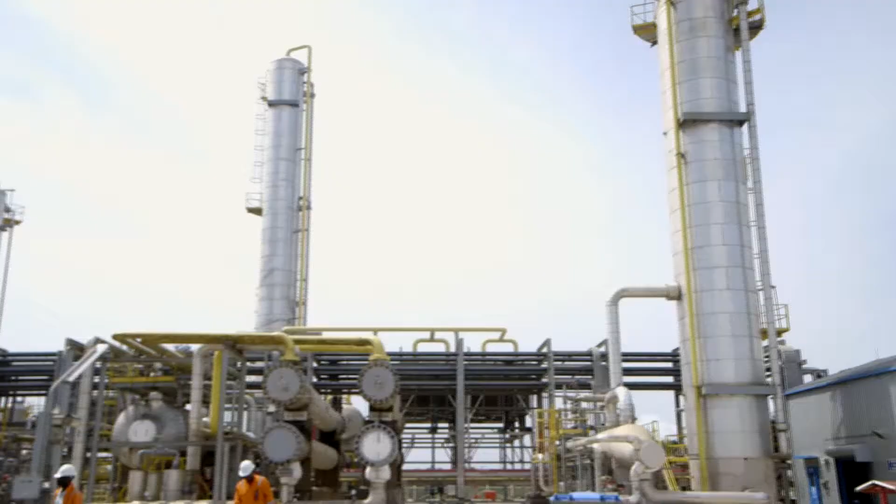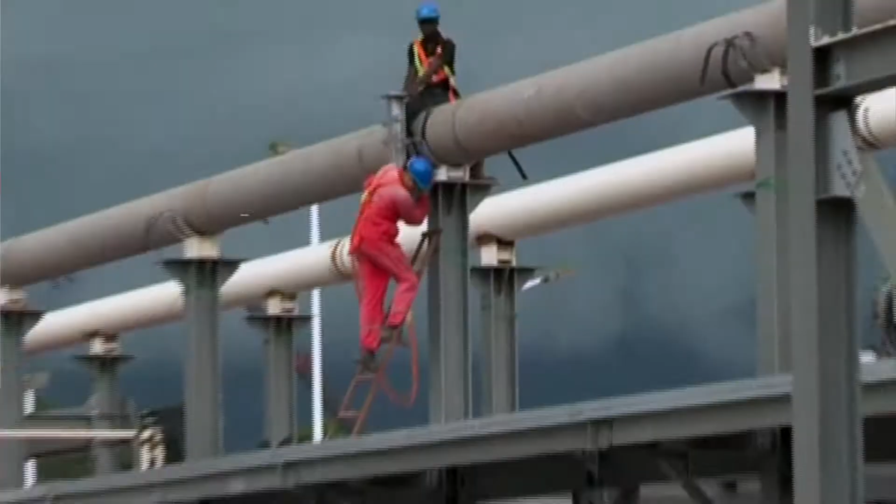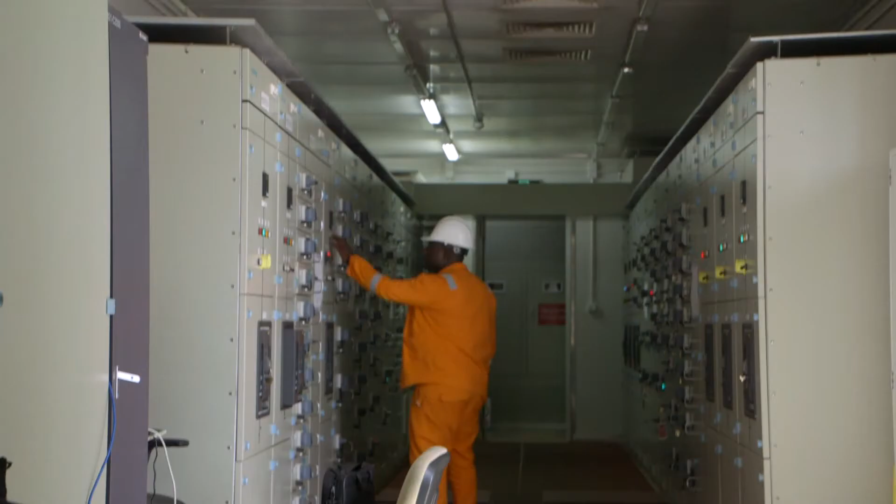We had initially employed the services of what you call an operations and maintenance consultant. These were the Chinese, and they have been actually operating the pipeline and the processing plant on our behalf, and we are grateful for that. But I believe it had come to a time where our men and women should actually take control of the consoles, take control of the processing apparatus, take control of our process areas, and actually run the plant themselves, also run the pipelines. So we have totally indigenized our operation.

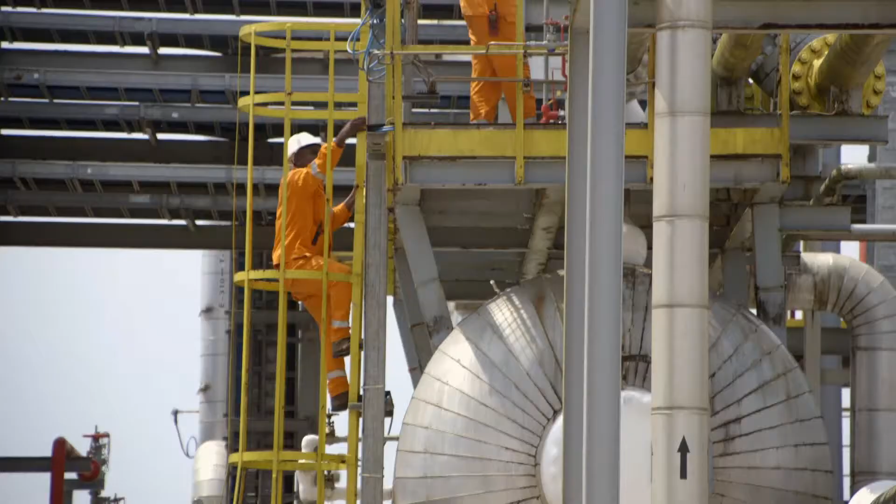So if you go there, as you did, you saw that almost everyone there on the process floor, in the control room, at our utilities area, they're all Ghanaians. You're saying that now the entire facility is being run by Ghanaians? Absolutely, and we're very proud of that. In 3 years we have totally indigenized. So we are very proud of that. That's a good story. That's a really good story.

It also has got some financial implications for us. We were spending close to about 10 million cedis a month just to employ the services of our friends, the Chinese.

The current components of the Ghana Early Phase Gas Infrastructure Project include the offshore export pipeline that is from the FPSO, located some 60 kilometers away from here, to the GPP, a 12-inch pipeline, high-pressure line.

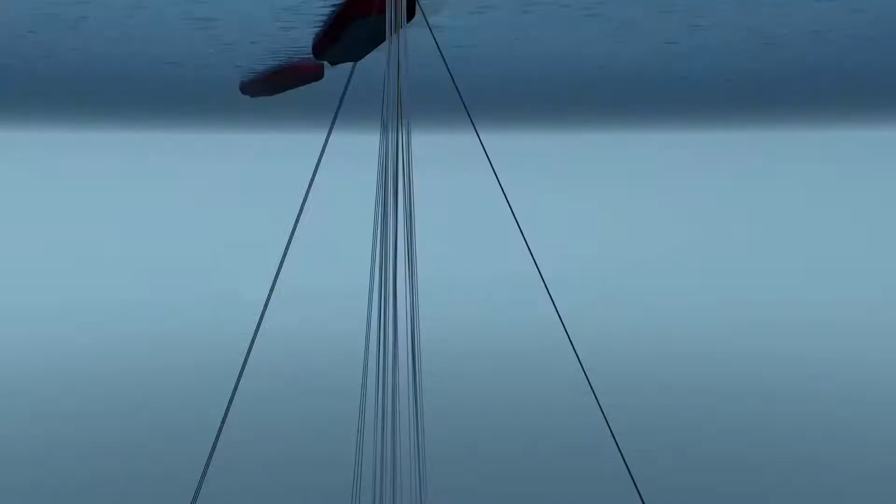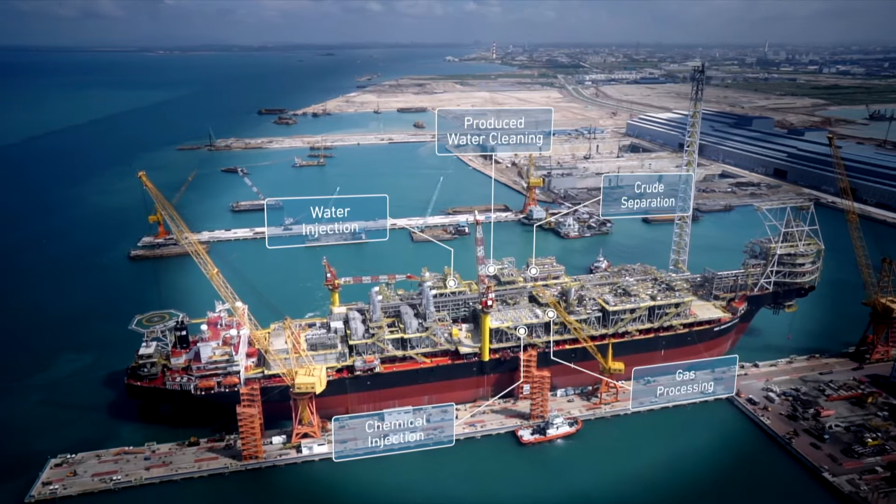From the indications of the flurry of activities on the sea by Tullow and ENI, it seems as if we are going to have many more sources of gas in the country in the future. Ghana Gas Company may well be what the doctor ordered to aid our ailing economy. Surely, it may just be what we need to establish our industrial base as a country. It is estimated that with the current gas discoveries, Ghana National Gas Company is going to be around for at least 25 years.

Ghana Gas's mandate is fourfold: we do gathering, we do transportation, we do processing, and we do marketing of the natural gas resources. The gathering typically is what you will notice—the offshore pipeline that takes the raw gas from the Jubilee field is a straight bullet pipeline, and it has a capacity to take as high as 240 million standard cubic feet per day under packing conditions.

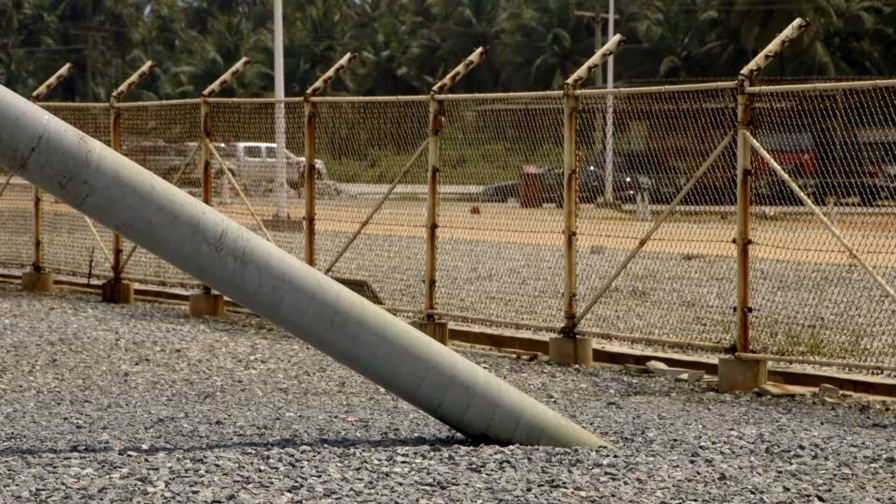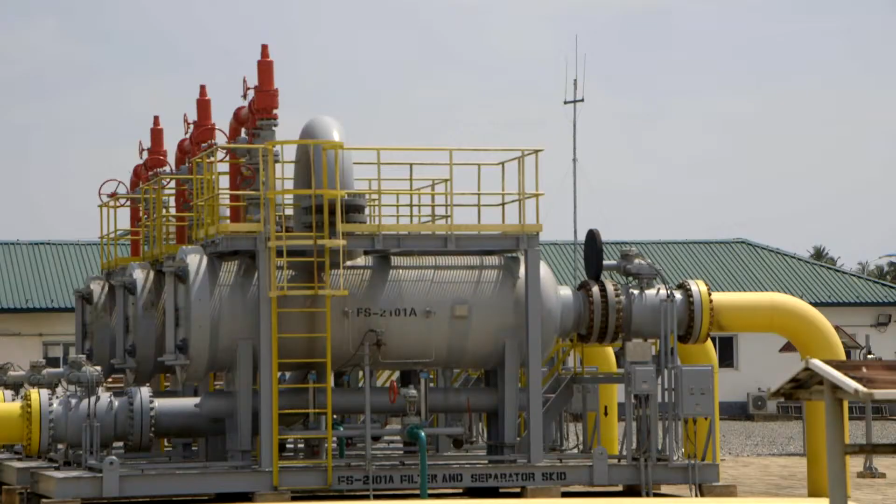So that line can allow other producers to tie in such a way that it serves as a gathering pipeline. After 58 kilometers at sea, the wet gas comes in and it is metered to ascertain how much of it is being taken into the processing plant. The first process is to remove all the impurities in the wet gas, after which, under very intense pressure and temperature ranges, the gas is processed to attain the dry gas referred to as the sales gas, ready for use by power plants and big industrial concerns.

Every hour we move into the plant, we check the parameters, and we also take data, readings of all the essential parameters in the plant. What we do with this data is that it helps us to be able to know the efficiency of our plant. These units are capable of cleaning the gas that is going out.

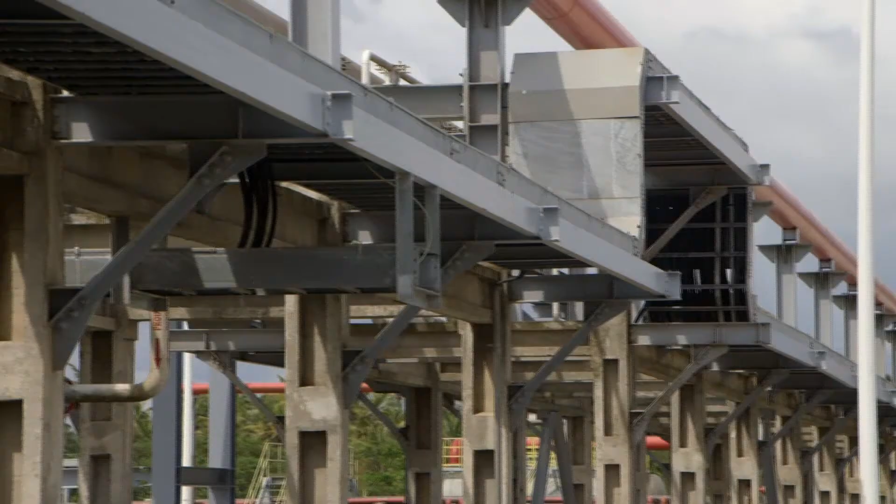And this is a measure to prevent smoky flare. You know, smoky flare, when it's smoke, it's pollution. And then again, when you flare, for safety reasons, it's good. Because if we don't flare and release hydrocarbon to the environment, there is that tendency that if somebody is smoking around their flare stack, or if a farmer is farming or a tapper is carrying fire, and there's a vapor cloud in the atmosphere, there can be a serious tendency of fire and explosion.

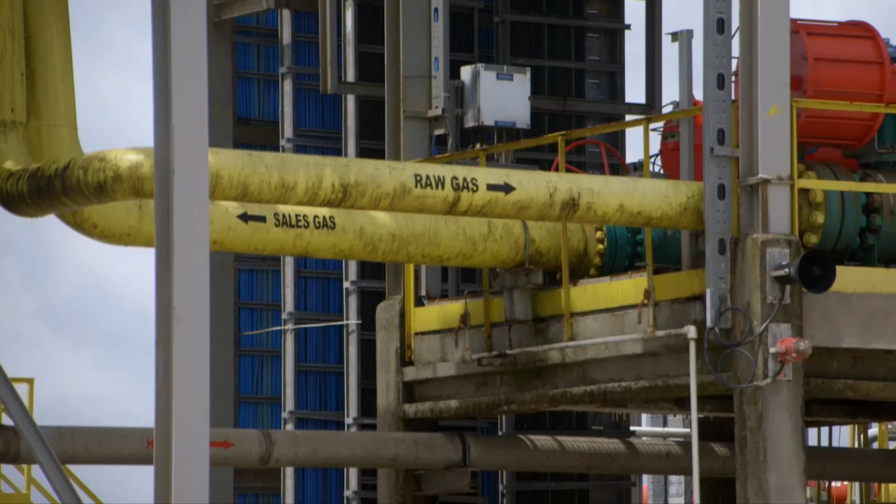At this point, Ghana Gas would have attained the kind of gas that can be sold to end users such as power plants and industries. And the metered processed gas exits from the plant at the same place as it entered, but through a different pipeline.

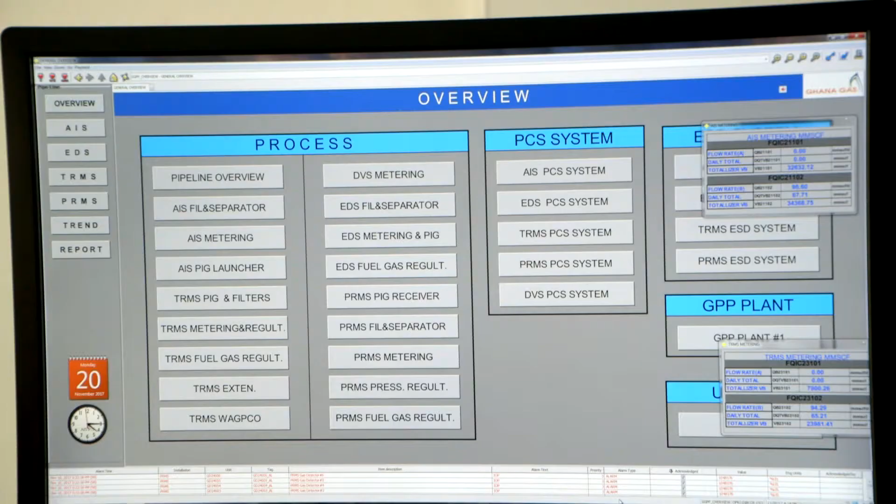At the inlet of the station, we have a gas chromatograph. What it does is take a sample of the gas online and give us the gas composition so we can know the quality of gas being produced.

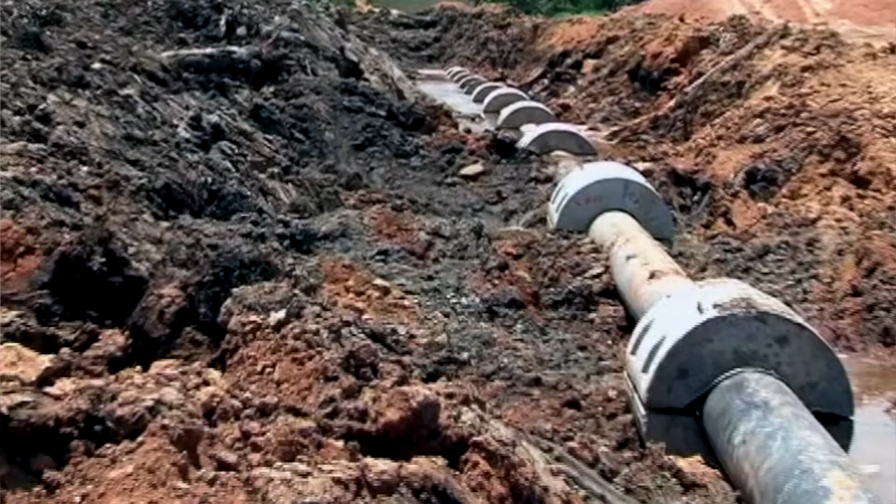From there, it comes through the filter separators, where the gas is further sieved to ensure it doesn't carry any particles. The dry component is taken out and sent through a pipeline from Atuabo, 111 kilometers, 20 inch, straight to Aboadze, where it is sent to VRA for power generation.

Ghana Gas is dealing with over 100 communities as far as our pipeline and related activities are concerned.

Before the project commenced, an environmental impact and social assessment was carried out on the ground before the facility was put up. During that process, mitigation measures were proposed so the project's impact doesn't negatively affect the environment. Because of that, we carry out analysis using the equipment in this lab.

The analysis is basically carried out for air quality, water, effluents, and noise.

Sometimes we organize sensitization exercises to educate the community on our activities, and we invite regulators to come in - that's EPA, the district assembly, and any stakeholder needed. They come in, assist, and we educate the community so we have a cordial relationship with them.

On a day-to-day basis, I'm in charge of cathodic protection and corrosion control, to ensure there is no corrosion on our pipelines.

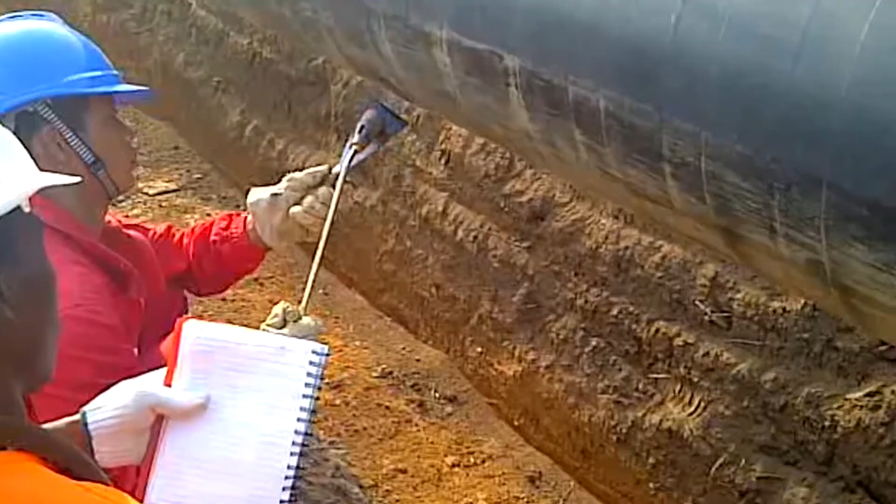We normally visit the right-of-way where the pipeline has been installed and carry out our tests. We're also in charge of inline inspection to check for leakages, cracks, anomalies, and other defects on our pipeline. When it comes to designing, we ensure whatever we do is in accordance with our standards. Basically, that's pipeline integrity.

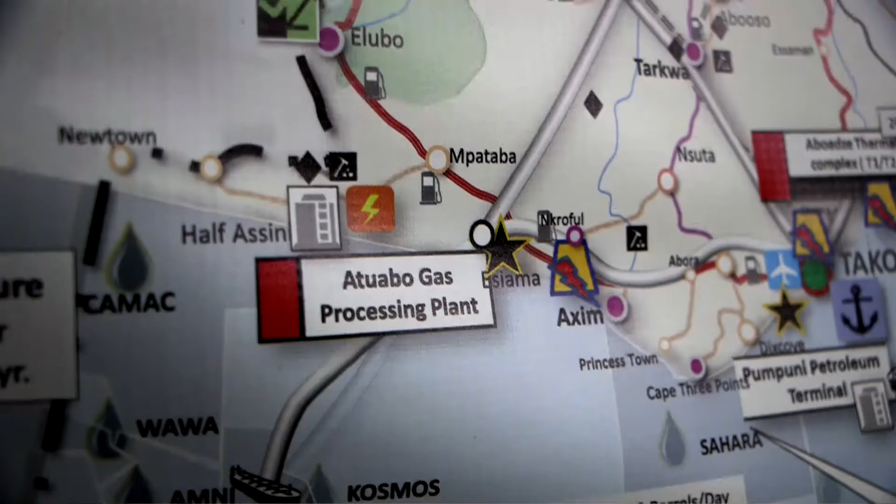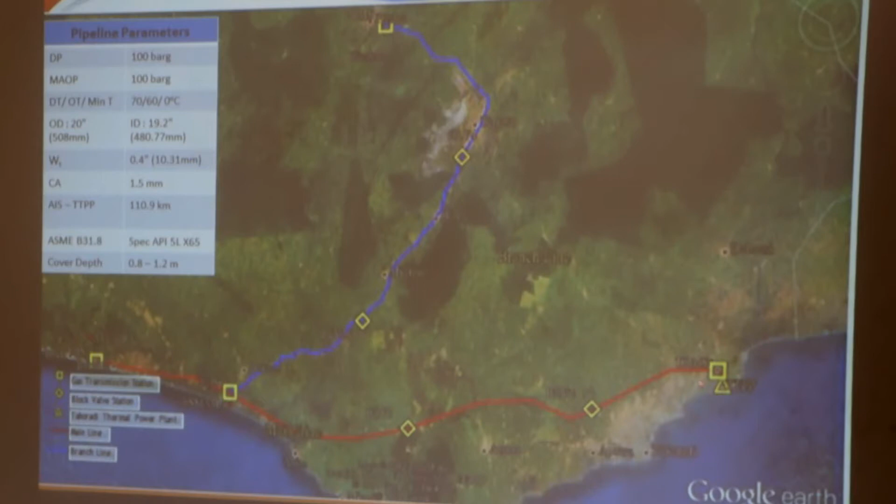If you look at the Ghana map, this is how our onshore pipeline looks like. This is Atuabo, this is Esiama. The main pipeline is the red line you see here, going through various districts and communities, all the way to the Aboadze Thermal Plant, VRA.

This is the TRMS, the Takoradi Regulating and Metering Station. VRA is just close by, which takes the gas and produces power for us.

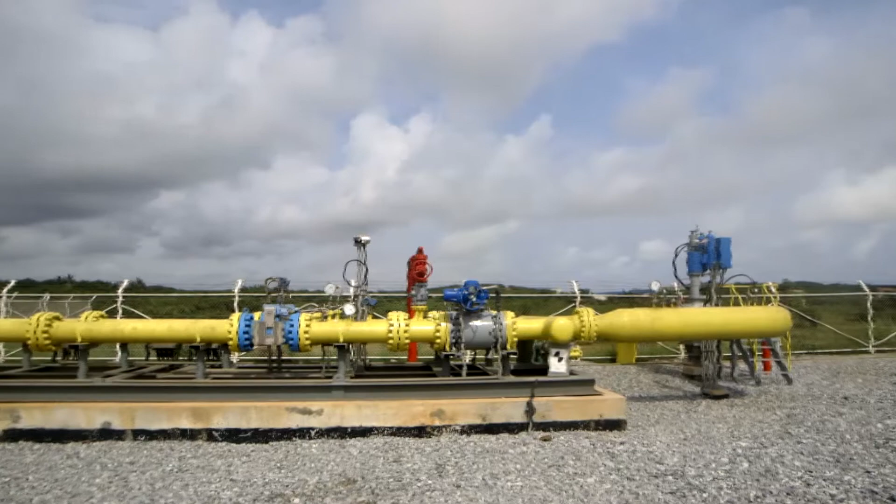At the Takoradi Regulating and Metering Station, TRMS, Ghana Gas Company supplies various facilities that need dry gas for production, such as the Twyford Company in Shama.

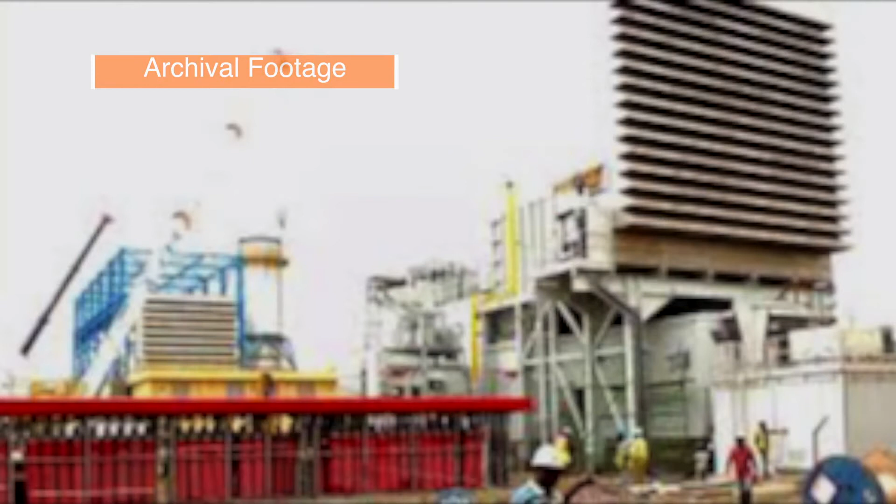Today, a number of power plants are using gas as a source of producing our national energy needs. It seems our future will rely more on gas as a source of energy than other available sources. Therefore, Ghana Gas is going to be a very important player in the production of energy in the country.

When it comes to industry, there are many industries stuck, not just for power production but needing gas as an input, because hitherto we did not have sufficient quantities of gas to inject into their production processes - steel manufacturers, for example. As we get more gas, our economies become more efficient, we come to depend on it more, and we improve in terms of our daily outlooks in life.

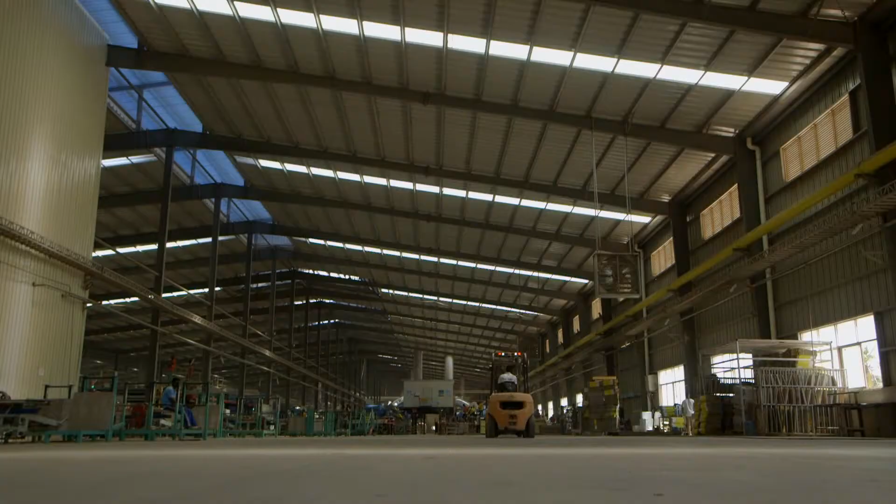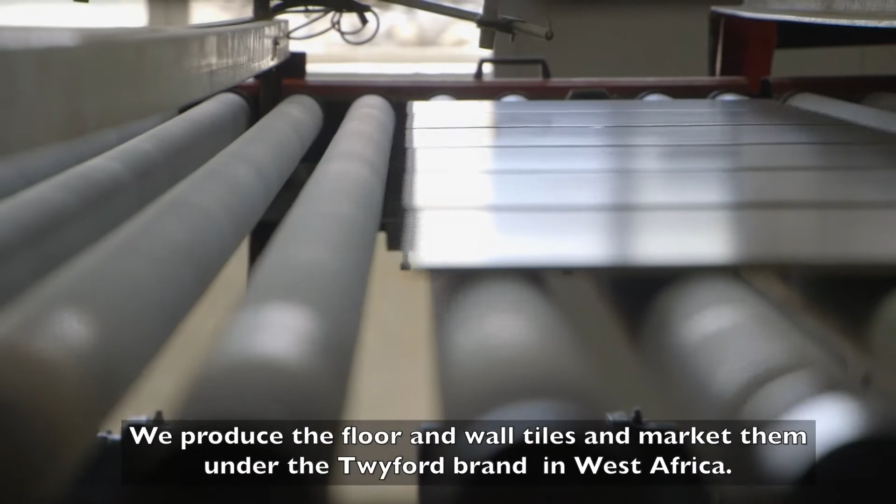We're doing floor tiles and wall tiles, using the Twyford brand to market in West Africa. Currently we have employed around 800 staff, and I think we are going to hire more.

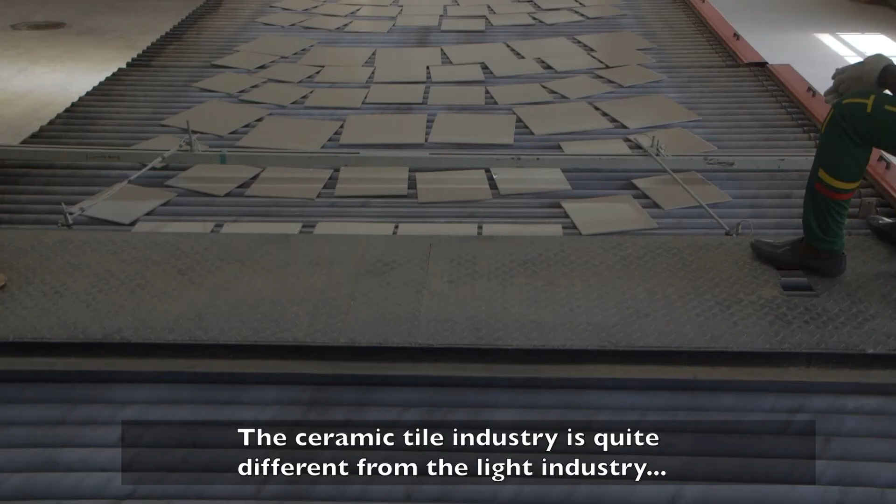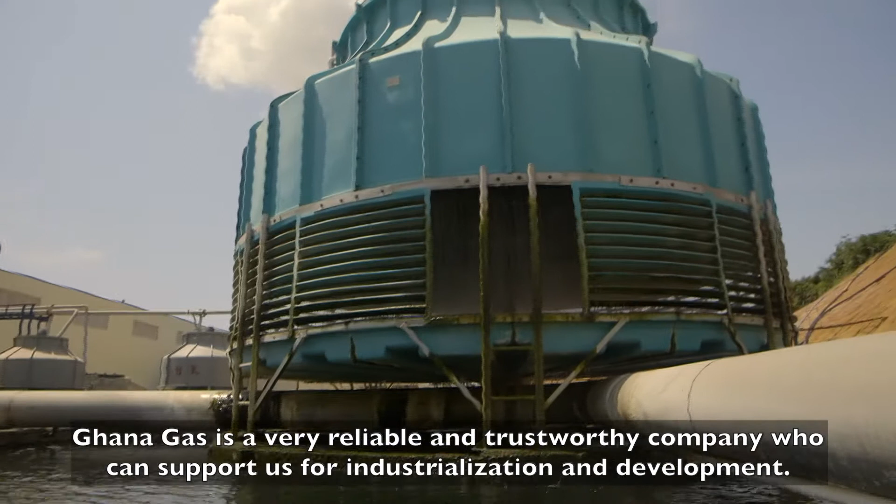Doing the ceramic tile industry is different from other light industries - you need energy for power and energy for heating. It's very important. Ghana Gas is a very reliable and trusted company that can support us for industrialization and development, not only for Twyford.

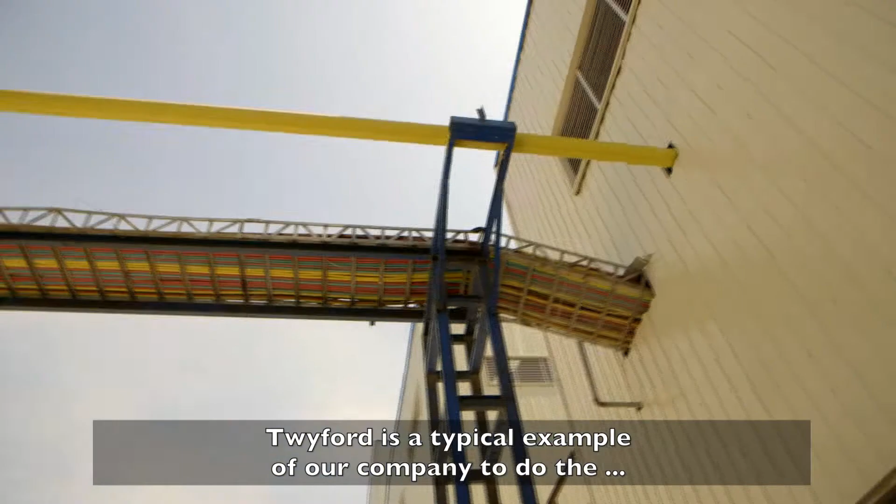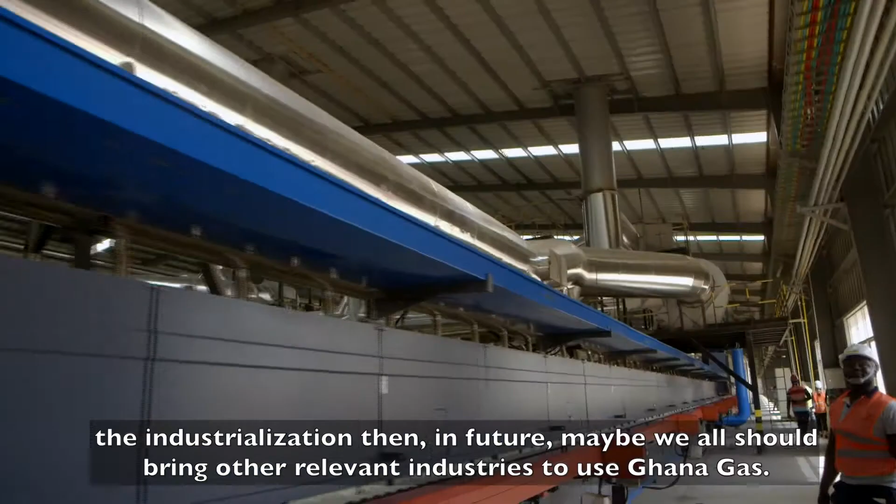Twyford is one of the successful examples of our company's industrialization. In future, we may also bring other relevant industries to use Ghana Gas.

While Ghana Gas produces dry gas for various power generating plants to use, the plant itself also uses its own produce to generate the energy required for all its operations. After all, why sell a produce that you cannot trust to use?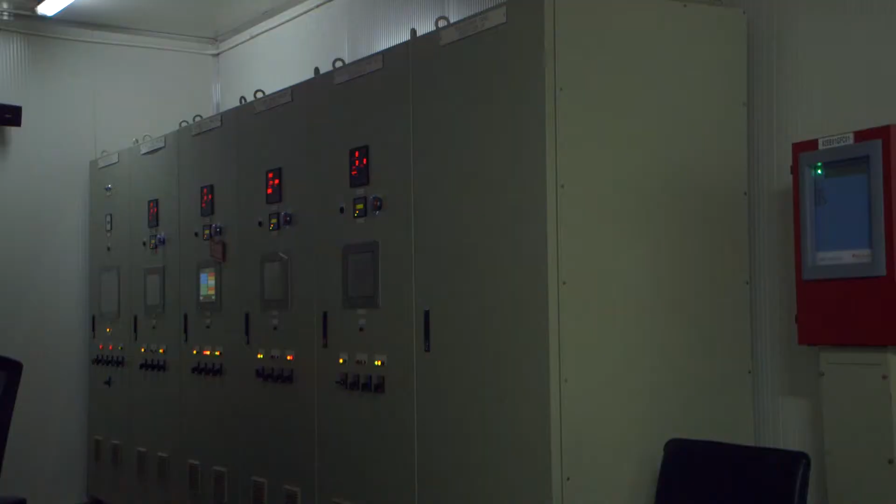The Ghana Gas power plants are able to generate in excess of 2,700 kilowatts. My job basically is to ensure that there is constant power available to the plant, and that it is also of the right quality.

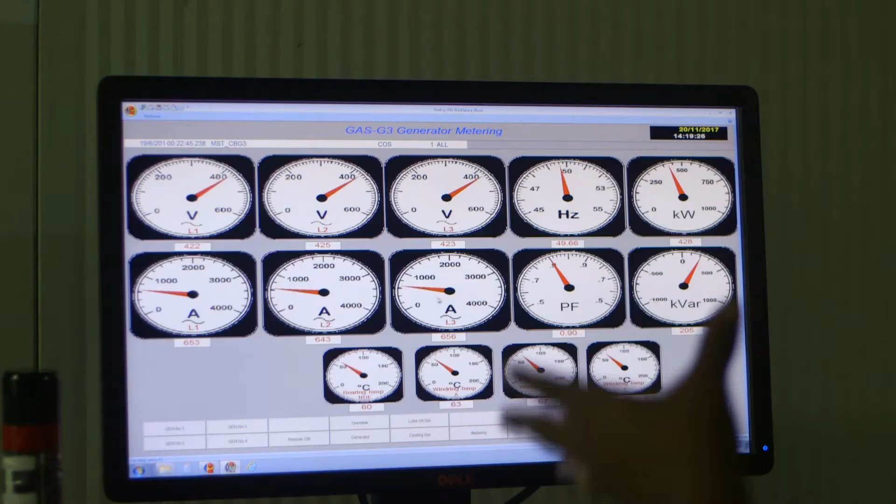I do an hourly routine inspection and monitoring. All the various parameters, I monitor them on my screen. So I make sure that the voltage, which is very important, the current, the frequency, and the temperatures are all within specified limits.

Once the dry sales gas has been extracted and sent to the various industries to be used, the remaining gas in the plant undergoes more processing, out of which a second produce, liquefied petroleum gas or LPG, is attained. Increasingly, this product is becoming most essential in the daily lives of Ghanaians.

Typically, we have 4 storage tanks, each of capacity 2,000 cubic meters, totaling 8,000 cubic meters. After storing this LPG, we also have a pipeline linking the storage tanks straight to a loading gantry.

Vehicles, that's the road transportation tankers, come there to offload the LPG to the local markets. We normally operate the pumps. For our area, most times we do manual operations - manually opening valves, isolating the lines, lining up valves, pump operation, and all these things are part of our day-to-day activities.

We have a company, Quantum Terminal, that we normally transfer the product to, and they also give it to off-takers.

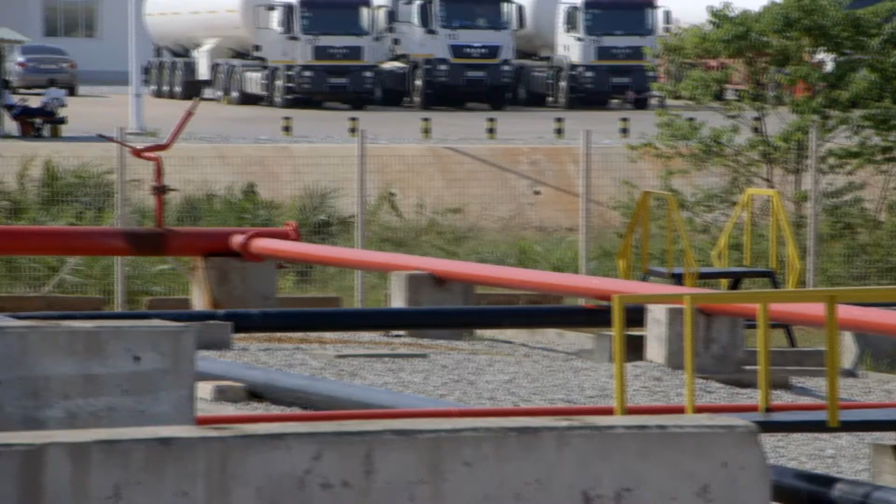From the meters, the product gets into our tanks. We call them bullets, each of 500 cubic meters capacity, so it can store about 250 metric tons. One of these bullets can load about 10 trucks. So for the 3, we are talking about 750 metric tons of storage.

Ghana Gas and us entered into this partnership some years back, and it's been very helpful to us because as an evacuation facility, we don't have business if Ghana Gas is not producing and sending the product to us. So since 2014, we have had to depend solely on the product coming from Ghana Gas, and that has sustained our business. It has given us the opportunity to employ people.

Of course, it's given us income, and on the national level, we can say that since Atuabo Gas started, since Ghana Gas started producing gas, it's helped stabilize availability of the product on the market. We currently contribute 50% to the current consumption of LPG in the country. Take that away, and we wouldn't have had 50% of LPG in the country, and I think we would have been talking about a shortage of LPG, or importing more expensive LPG.

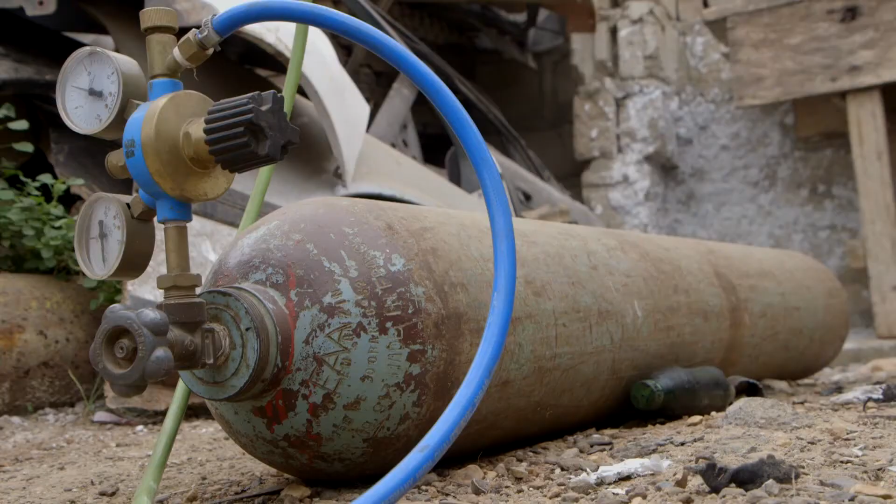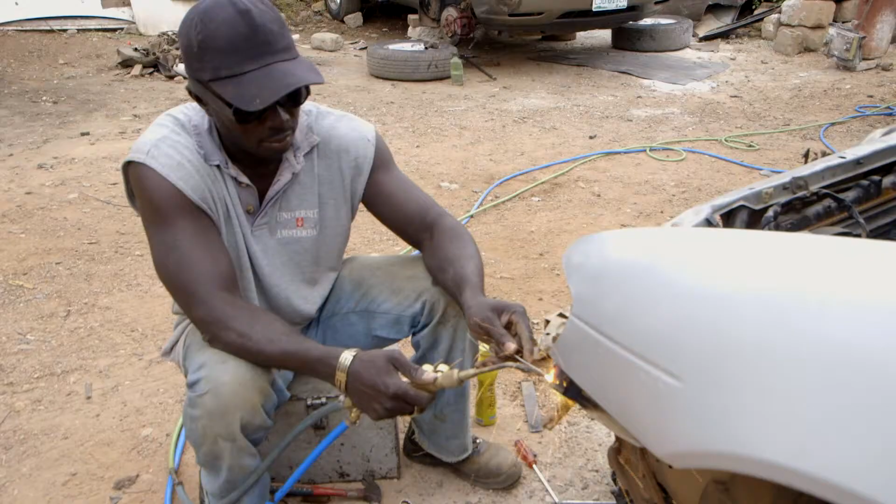In addition to this relief for those who cook, the LPG has become an essential power source in everyday transportation, just as this produce of Ghana Gas Company has become the main source of energy for the work of many artisans in the light industries, not to mention the electricity we see in our homes and offices.

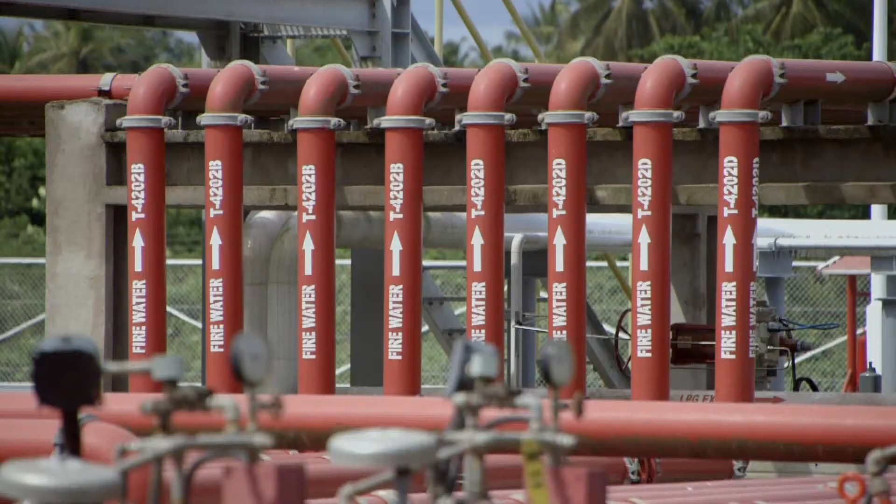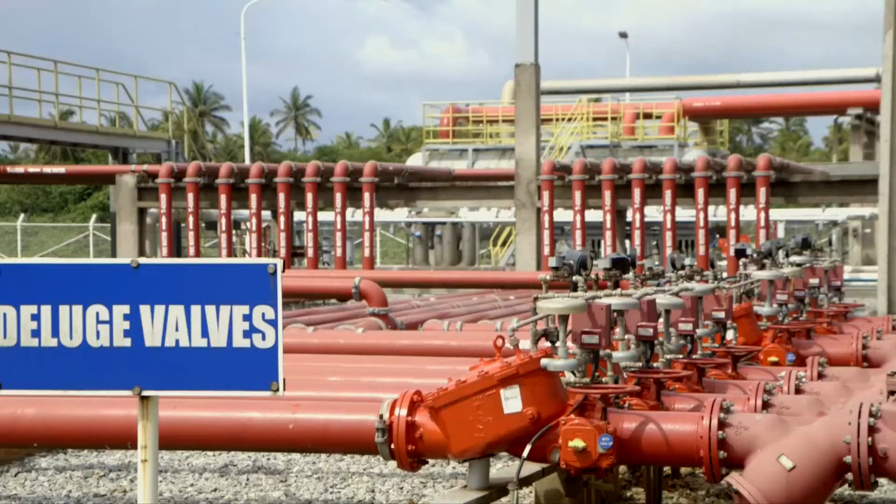It should be obvious now that at a volatile facility like this, safety must be a key component of their work. An elaborate network of red-colored water conveying pipes has been built into the whole processing plant to ensure that water is available wherever and whenever it is needed to cool various tanks and fight any fire.

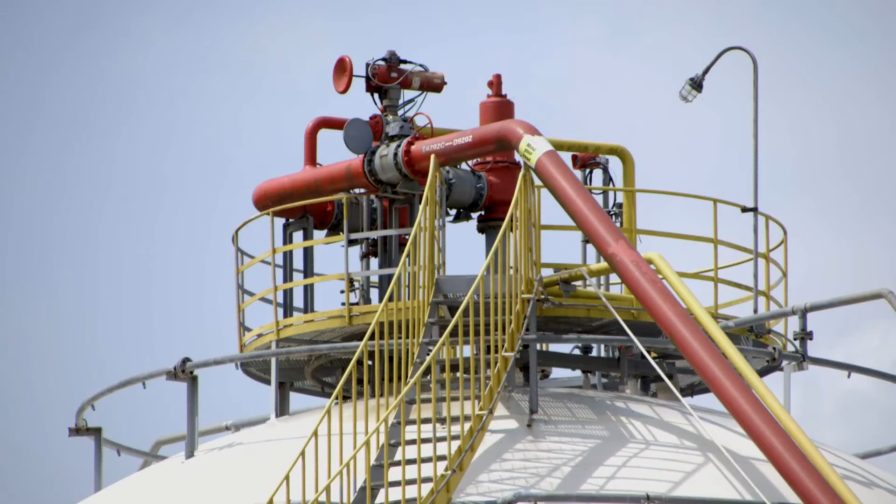Those two tanks you can see are the firefighting water tanks. Each one stores a capacity of 4,000 cubic meters of water, about 4 million liters per tank. Per the design philosophy, one tank can supply water to fight any kind of fire within the facility for an average of 6 hours.

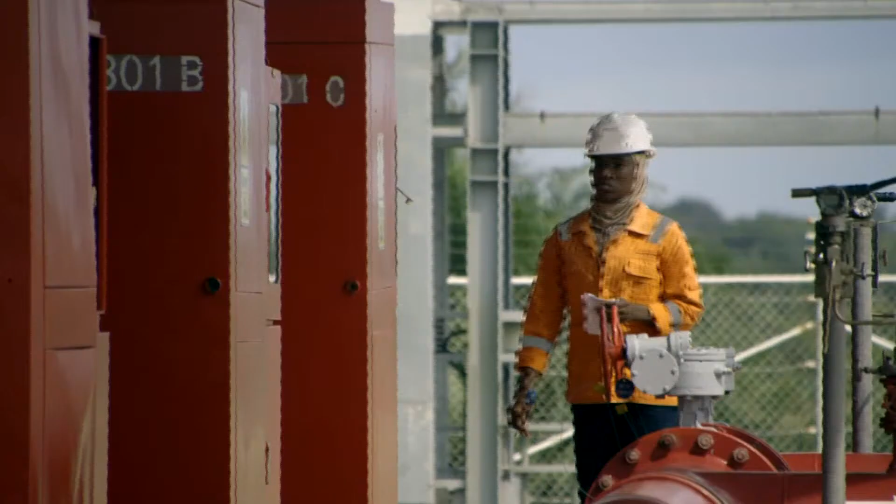That is how far. If we do have any fire in the facility, we anticipate that within that period of 6 hours we'll be able to mobilize external support to add to what we have within the system. Also scattered around the facility are a number of communication devices and public address systems that allow for easy information dissemination to everybody on the plant.

So that is the furnace for heating the hot oil. The hot oil then goes to heat up the towers. When it is cold, it comes back for reheating. So it's a cyclic process.

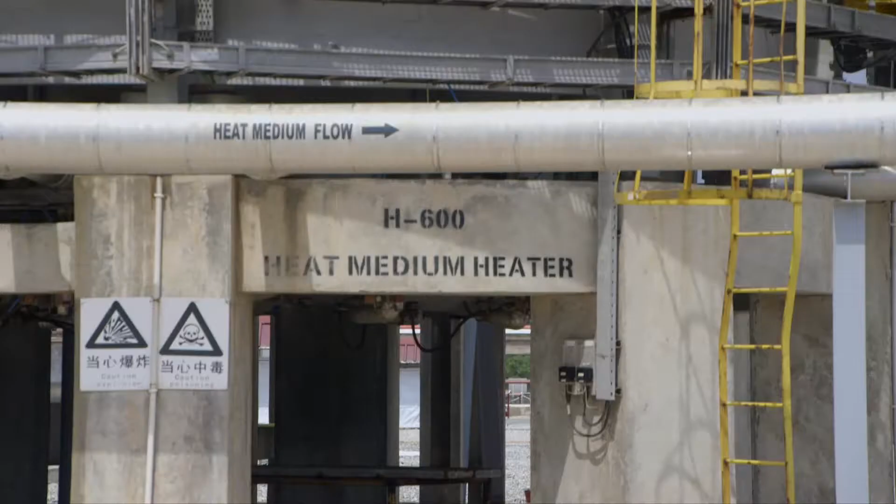After the LPG has been taken, there is yet another process. With expander compressors that allow for raising the pressure and cooling the temperatures, the pentanes and the condensates are also extracted. We have about 2 tanks for the condensate and 4 tanks for the LPG gas.

What we normally do during our day-to-day activity is to monitor the tanks and their process parameters, ensuring that the product coming in from the process area is in good shape. We also supervise the transfer of liquids from these 6 tanks, namely the condensate tanks and the LPG tanks.

For the condensate tanks, we have third-party off-takers that normally come to our condensate bay, and we are in charge of loading those trucks with condensate.

The volatility of the isopentanes and the condensates is such that its handling must be under very serious scrutiny. That is why Ghana Gas and the Government of Ghana are engaging General Electric and Mariners to build a plant that could use these products in places of close proximity to the gas plant.

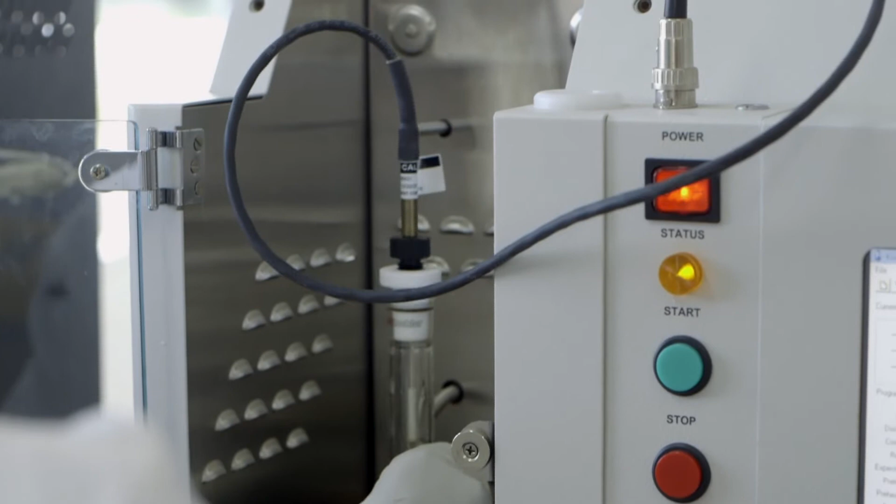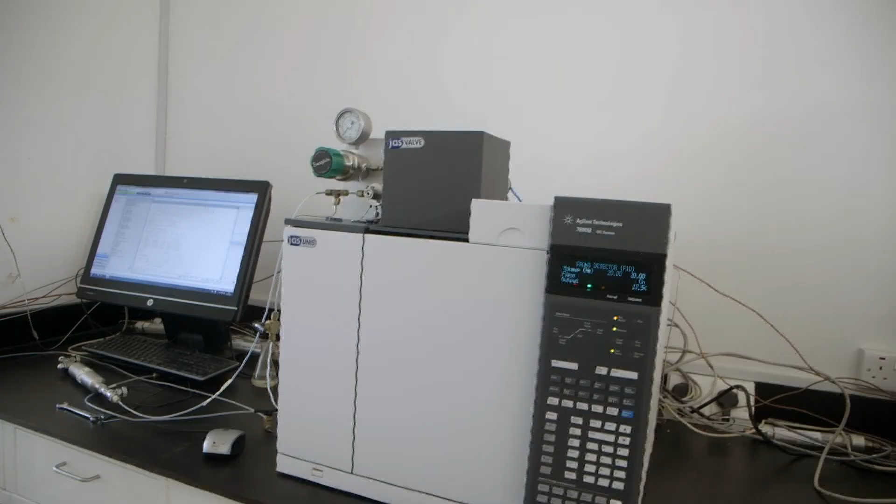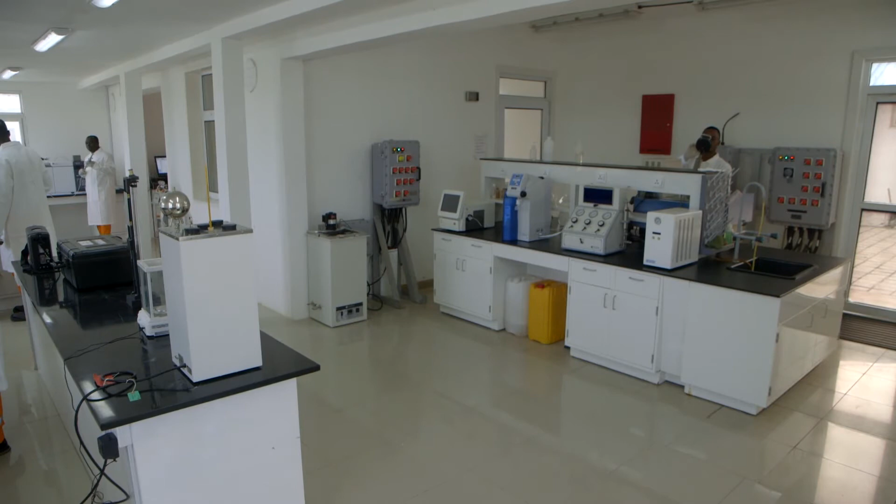We work with these two main instruments here. This is called the gas chromatograph, and its function helps us determine the compositional makeup of whatever is injected into the GC, whether it's raw gas, sales gas, or LPG. This equipment is able to determine the makeup of the gas.

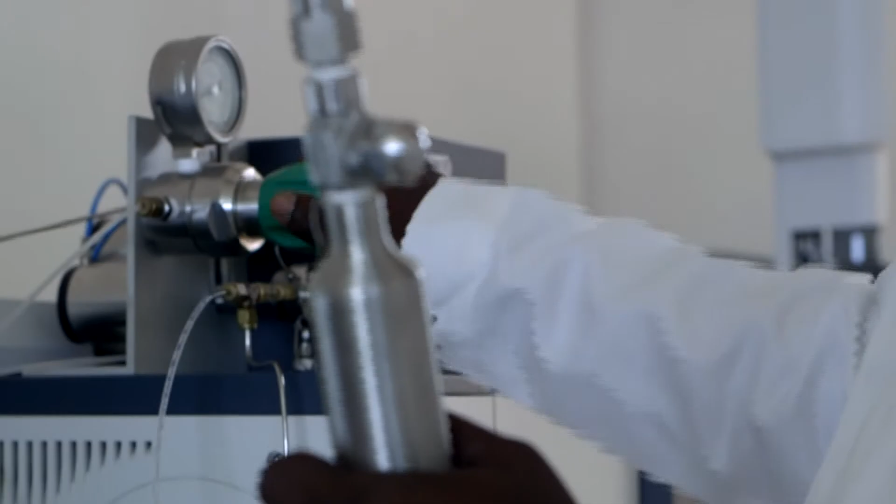Over here we have the automatic distillation analyzer. It's often used for analyzing the different boiling points present within a condensate or within a gasoline. This is the purpose of the automatic distillation analyzer.

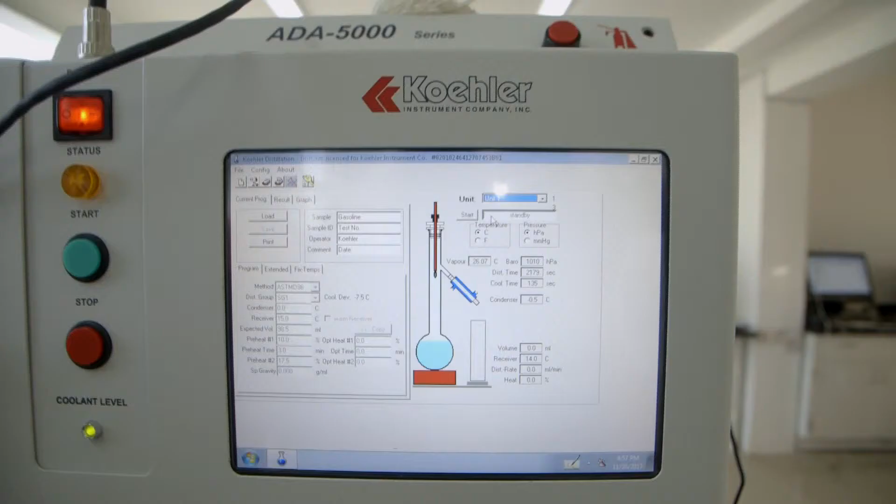What it does is apply heat to the sample within it. As the sample has different fractions and compositional makeup, as it boils out, the lighter ones often come first, until the whole quantity is boiled out, and we end up getting a profile of the condensate within it.

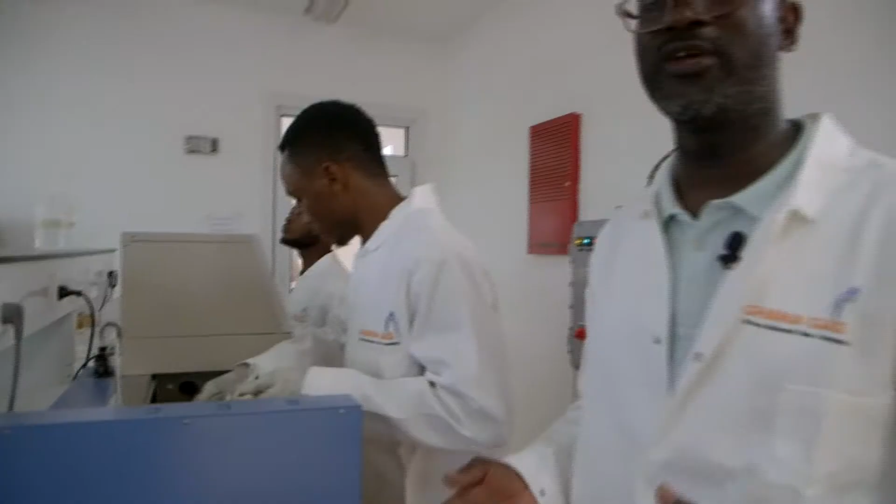We need to know the pressure that when petrol goes into a tank or a bulk vehicle, like the tankers we see on the road, what kind of pressure it can be subjected to before it is not safe. So every time we do any condensate analysis or LPG analysis, one of the key things we need to determine is the vapor pressure.

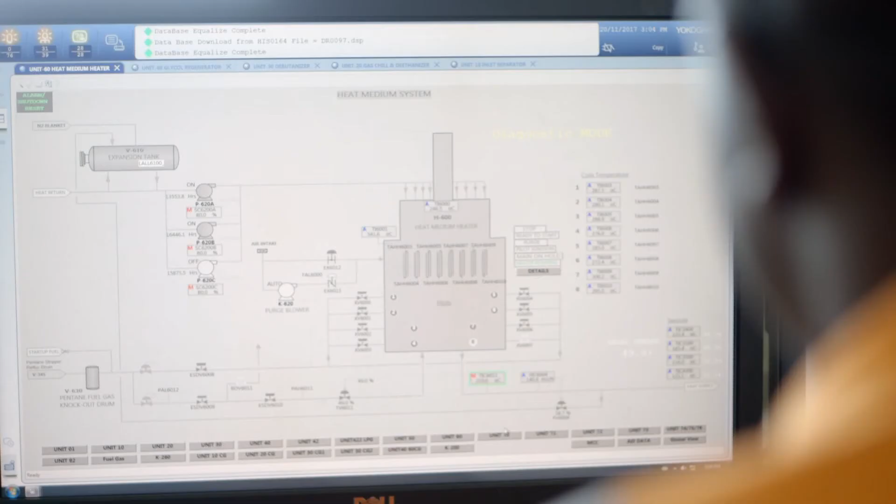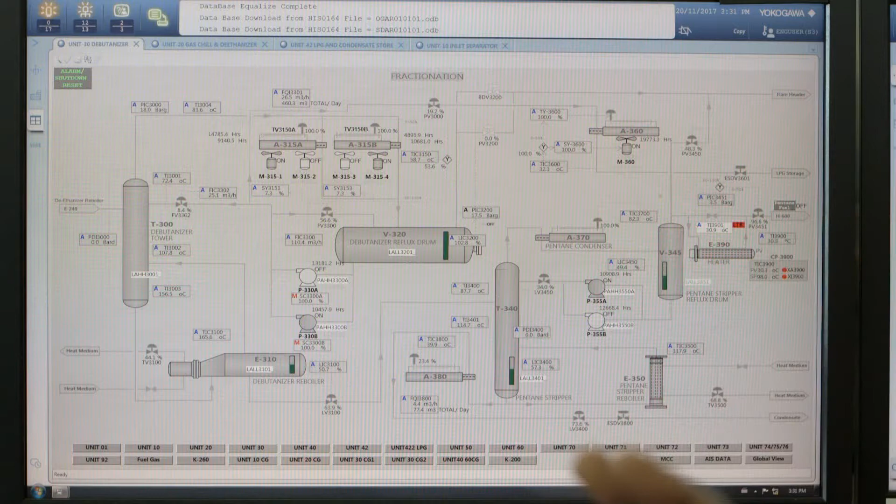All these activities across the plant are closely monitored by a group of young engineers at the control room, to ensure that every single activity goes on when it must and in the way it must, and to ensure that the automated machines are all working perfectly.

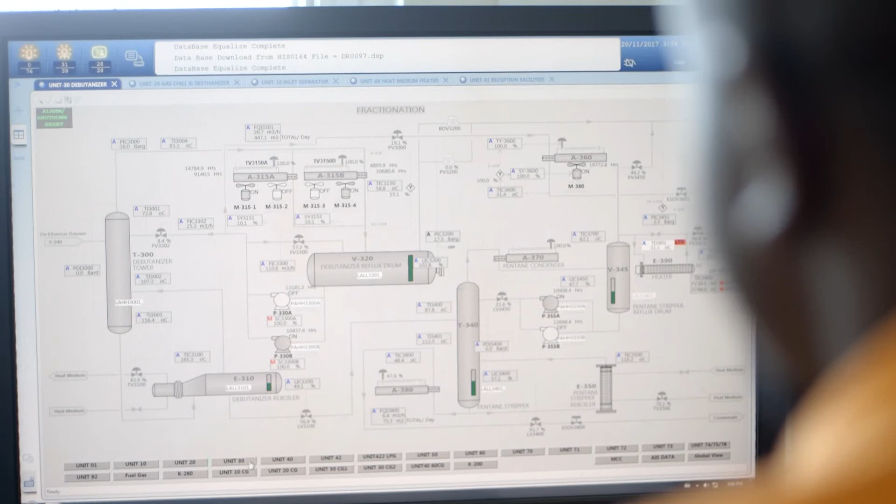We monitor and control the process parameters here, and we also receive gas into the facility. What we have here is your HMI. Everything that is on the field you can see here on the HMI. So what we do basically is monitor and control the process parameters to get the right gas specification so that we can send it to our downstream partners for consumption.

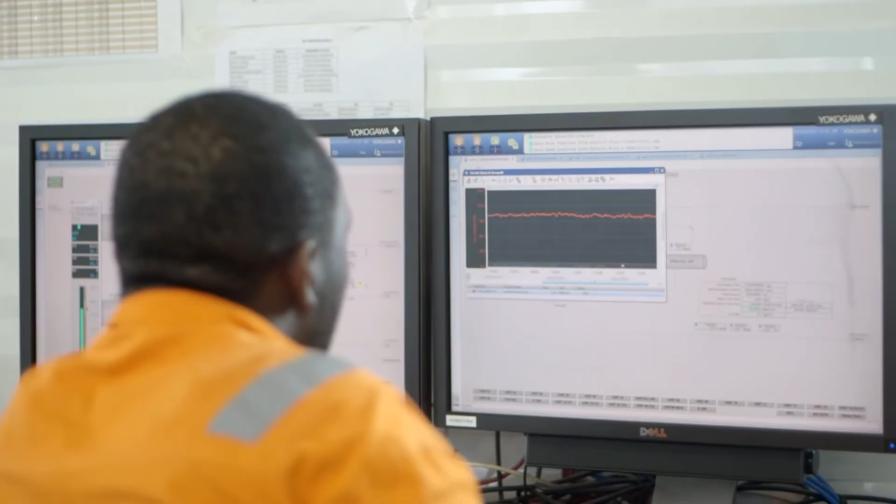From the inlet filter, you go to the de-ethanization unit. That place is called Unit 20, the gas chilling and de-ethanization unit. The gas comes from the filter and splits into two, going through the gas heat exchanger and the gas-liquid heat exchanger. At this unit is the first place you get our first product, which is the sales gas that goes to VRA or TRMS. So this is where we get our first product.

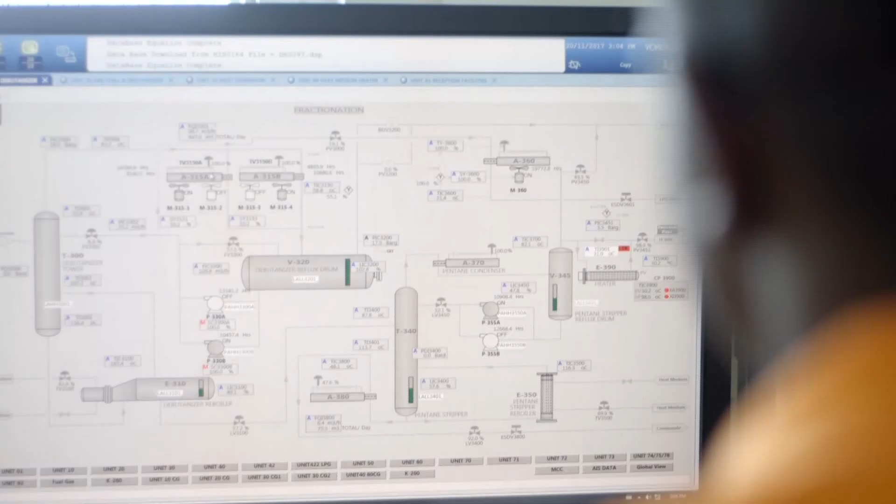The complexity of all these activities suggests that these young engineers must always be on top of their game. Therefore, some form of training must be going on periodically. As a company, they have in place good training programs. So annually, each one of us are trained to build on our competencies so that we can effectively undertake our duties.

As a storage tank and rotating equipment engineer, we believe that the entire industry, for it to be sustained for the long while, really demands that we totally build capacity with our indigenous human resource. And that's what we intend to do.

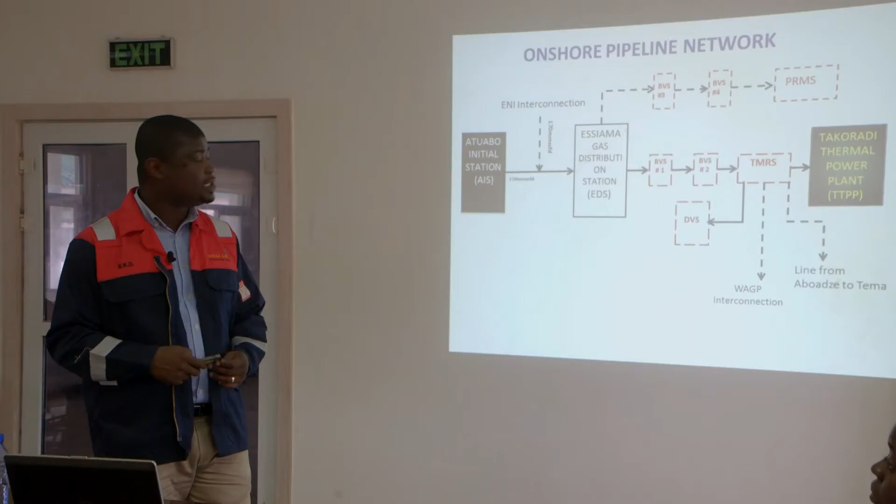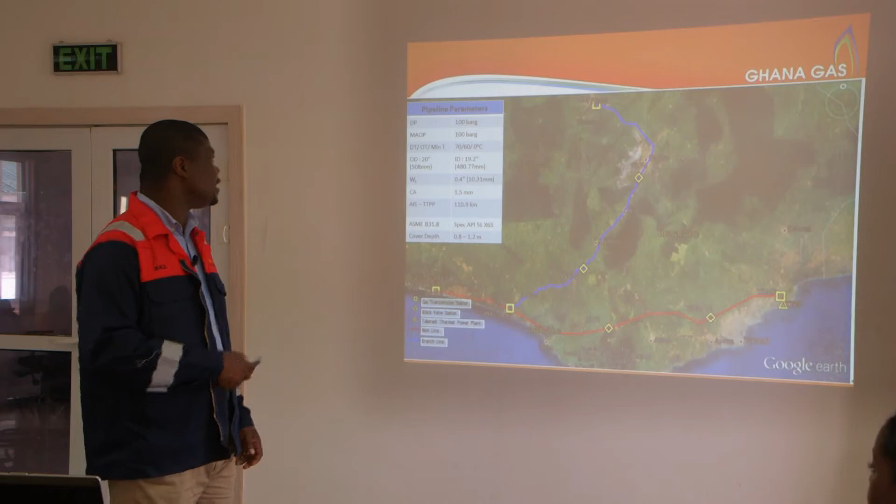Certainly the indigenization effort is one of such attempts. And we'll continue to make sure that we train our men and women along those three areas: operations, maintenance, and design, to be able to handle the challenge.

This has yielded great dividends, such that for a volatile industry like gas processing, Ghana National Gas Company is yet to record any major casualty emanating from lack of maintenance or non-adherence of safety protocols.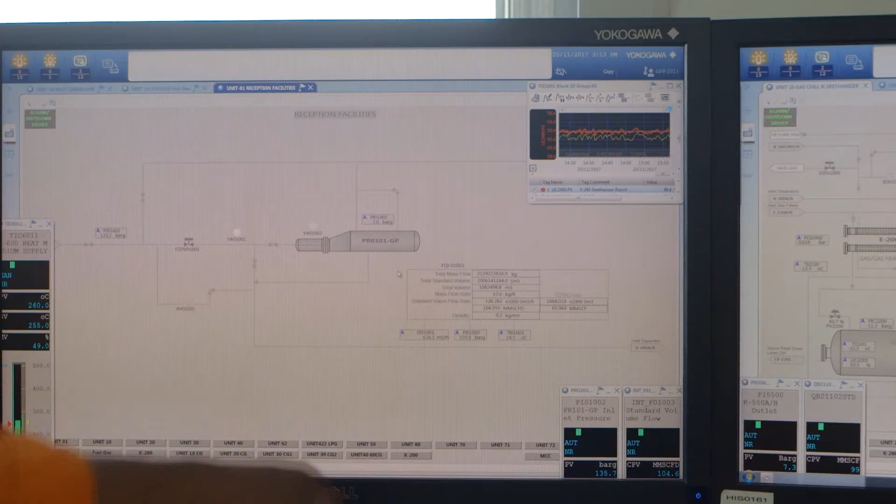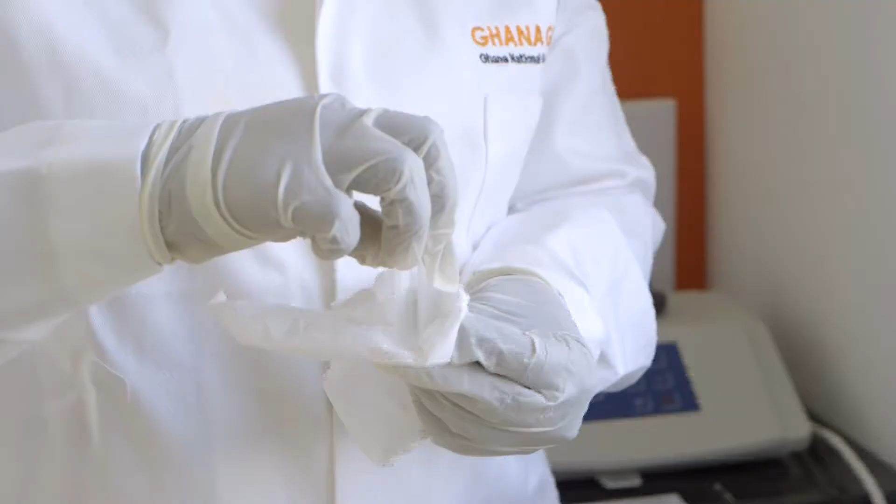It is the adherence to these safety precautions and the diligence of these indigenous young engineers that has made Ghana Gas Company so successful that the communities in which they operate can now benefit by receiving invaluable support from the company. We can say that this is a national infrastructure, but it sits in the backyard of people who wake up all the time to seeing this thing that they may not understand at all.

And they look at it for as long as that infrastructure is going to be there. So besides being good corporate citizens, we believe that it behoves on us to make sure that we do have a corporate relationship, a community relationship that would make our host community be comfortable with our presence.

There's been numerous social responsibilities that has been done, building of schools, improving the health facilities of the people, making sure that the environment within which they live becomes a better place for them because they have a strategic national asset here where they are part and parcel of the Ghana Gas community.

So we engage them a lot. Our roads are well done. Our needs in terms of what will give an option into getting work are all in a way provided. The people around here are fortunate.

And I am fortunate that it happens in my time.

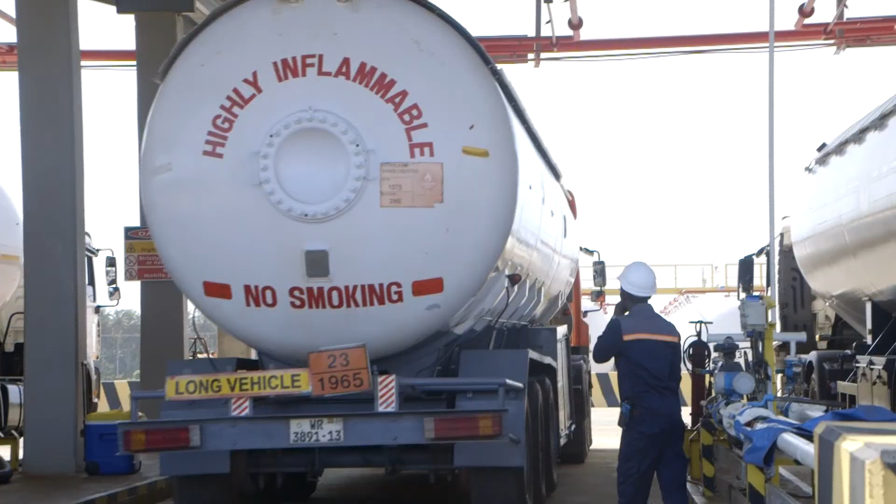With the past behind, Ghana National Gas Company has great plans for the future. We believe that we can use Ghana Gas as a catalyst to develop a petrochemical industry in this district and the region. The government is planning on doing one fertilizer plant at Nzema East and then another one at Jomoro.

So as a district, we have been approached by some private investors who want to go into production of ethylene and polyethylene using ethane from the gas. We have written to Ghana Gas already, and Ghana Gas has shown keen interest.

If you look at the configuration of the current pipeline, it's just laid along the coast, going from Atuabo all the way to Takoradi, with an intent probably to extend it all the way to Tema. So the Esiama-Prestea line is a very strategic pre-build, towards building a network of pipeline in country. That will be the critical artery in terms of diversifying our supply source going inside the country.

So Ghana Gas' presence is really significant, not just for addressing our power shortage problem, but also contributing modestly to our forex. We certainly believe that we will be the bedrock for the industrial revolution which the president talks about.